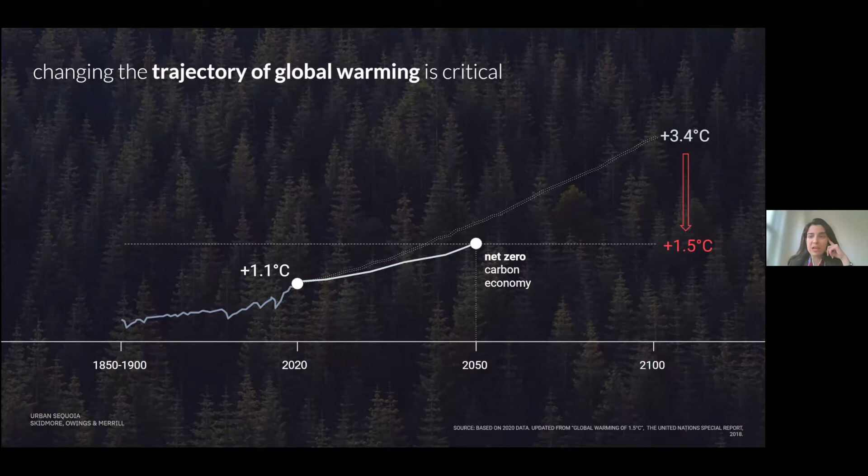And to set the tone a little bit, I think if we keep on going as we do, business as usual, we're about to hit 3 degrees or so by the end of the century. And yet our target should be around 1.5 degrees. So we all have a role to play as individuals, as professionals, and as a society in this as well.

And as part of this growth, urban areas have a big role to play, of course, and we do know the benefits of compact environments, and how resilient they can be, etc.

And it's assumed that with this type of population growth, the demand in the cities will grow also. We are expected to have 2 times the built area by 2060, which is a huge growth if you think about it. And with this equation, the cities around the world account for about 70% of carbon emissions globally.

And this is not because cities are worse than other environments. I think cities are just more compact and the density is so much higher that their emissions are actually higher than other environments. But this shows the importance of how urban environments can become a key player.

And rather than being part of the problem, can we be part of the solution? These are some of the provocations that we started with when we first launched this project.

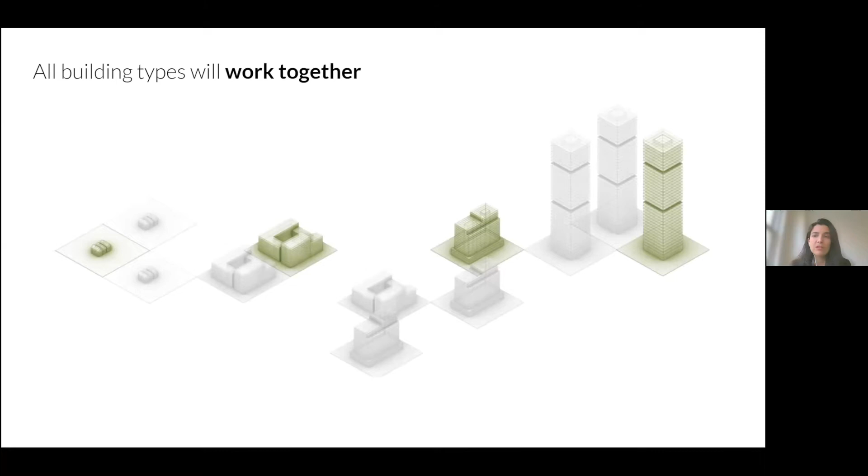But many of the systems and technologies we're looking at today can apply to others, and we do recognize that all different scales and sizes will have to work together in a built environment as a network to create an impactful change. So there's the Urban Sequoia idea born, and as part of this exercise, we're exploring maybe three different categories of technologies and innovation solutions.

Biomaterials: these are materials that use natural processes, such as biobrick, to actually produce building materials, maybe an alternative to timber or bamboo, which are often referred to as net zero or net positive materials.

The second one is nature-based solutions. Can we look at, for example, microalgae and its production on site to actually use it as a biomass, a biofuel? And then the third one is technological advancements, such as direct air capture technologies.

Can we actually imagine a world where direct air capture becomes adopted in the built environment rather than existing in a farm format, as we often refer to it?

With this type of ideas, I think we can probably safely say that today, with structural optimization, architectural optimization, and careful selection of materials, we probably end up at about 60% reduction. To go further, another 35%, we are looking at biomaterials, and we're thinking that's day one. If you look at the lifespan of a building, if it continues to sequester carbon, we can actually be carbon negative, about 3.5 times the emission reduction of a typical building.

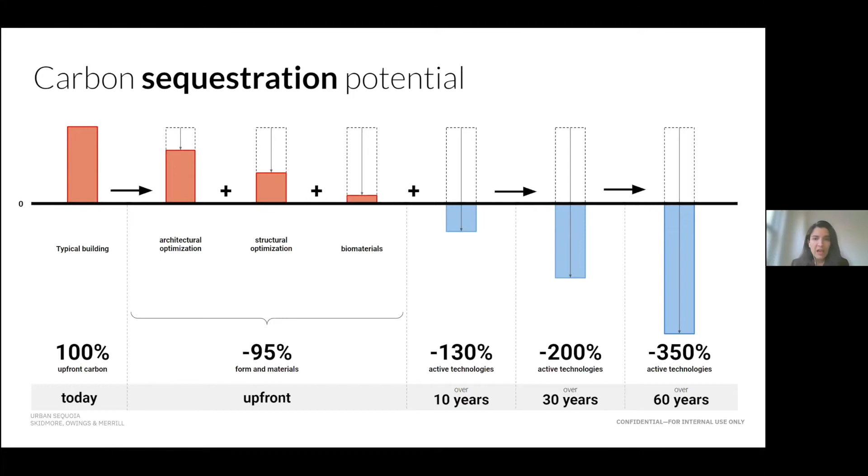This is extremely important. So rather than thinking of a building as an emitter through its lifespan of 50, 60 years, can we see the building as a carbon absorber, a carbon sequestering tool for those 50, 60 years? To do this, many of the systems we look at are going to have to come together. There's not one solution here, but many of these ideas coming together. And Aaron, you can walk us through a bit more detail here.

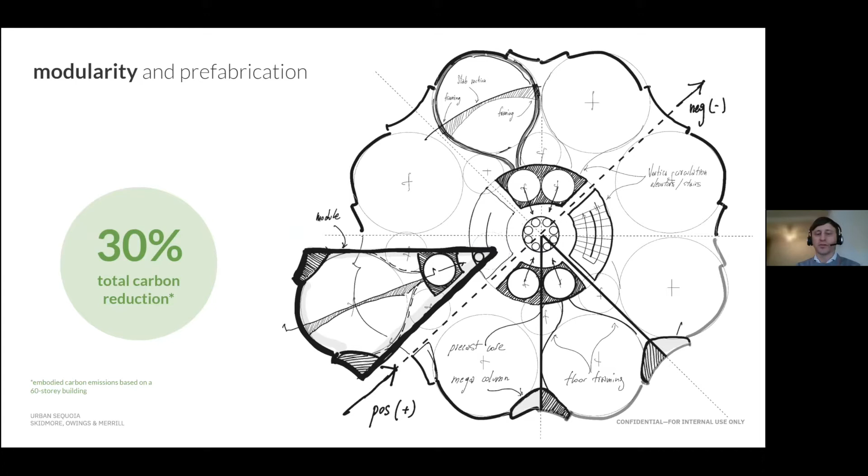In the scenario where our buildings could have 85% prefabricated and modular elements, we could achieve better efficiency, reduce waste, and less movement of people and goods, meaning less pollution to our cities. This reduces 30% of carbon from our high-rise buildings simply by modularity and prefabrication considered from the beginning. If we add integrated systems that are both passive and active, tall buildings of essentially 60 stories could save almost 60% of their carbon.

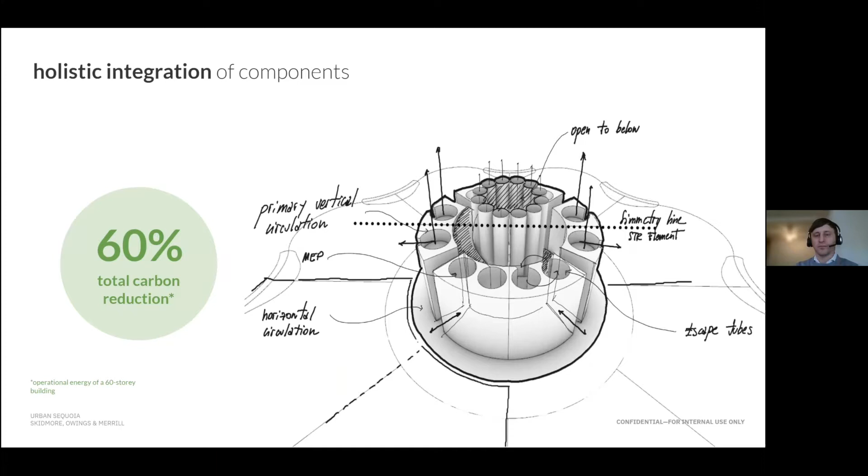The materials we choose for our buildings have an absolutely important impact on the environment, and this is where we must balance nature, natural resources, technology, and the built environment. When we leverage emerging technologies capable of capturing carbon from our atmosphere, we can find a balance between human technology and that natural sequestration process.

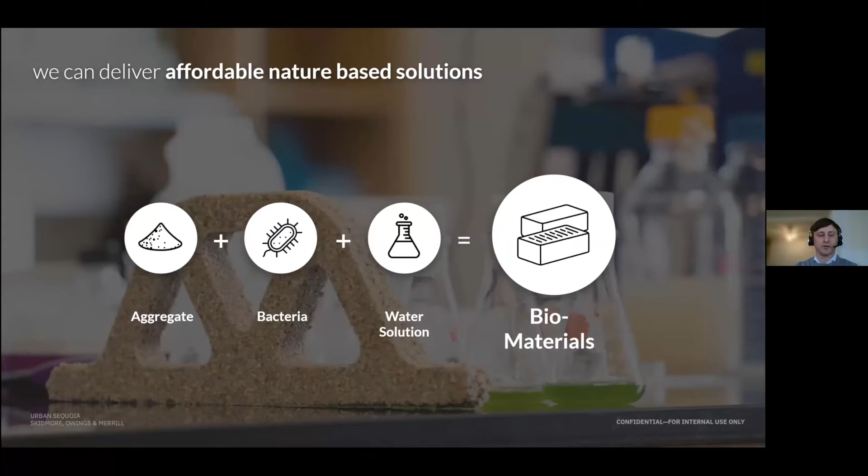With advancements in material science, these nature-based solutions can offer low carbon and scalable alternatives to traditional construction methods. In this situation, biomaterials have the capacity to actively absorb carbon. These biobricks can be made from locally sourced aggregate using low-tech construction methods, bringing a sense of equitability and access to these new types of technologies.

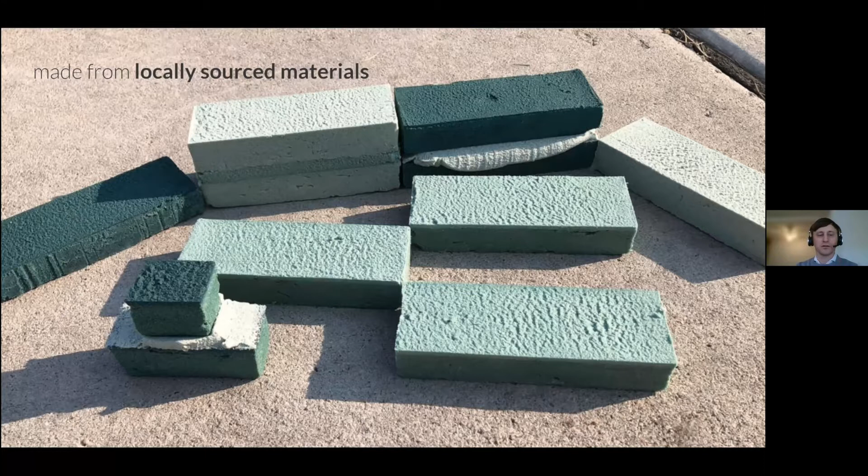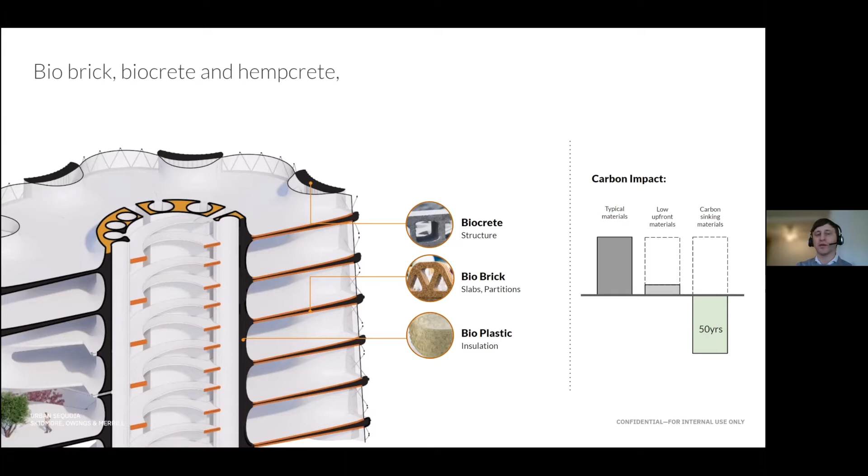Over the last 100 years, we've been predominantly using concrete and steel to build our cities. By simply opting for low carbon materials and considering things such as timber or even these emerging carbon sinking materials such as biobrick, bioplastics, and biocrete, we can significantly reduce the building's carbon emissions and impact on the city. Additionally, these biomaterials can be used in a modular way, beginning to push the boundaries between structural efficiency and carbon sequestration.

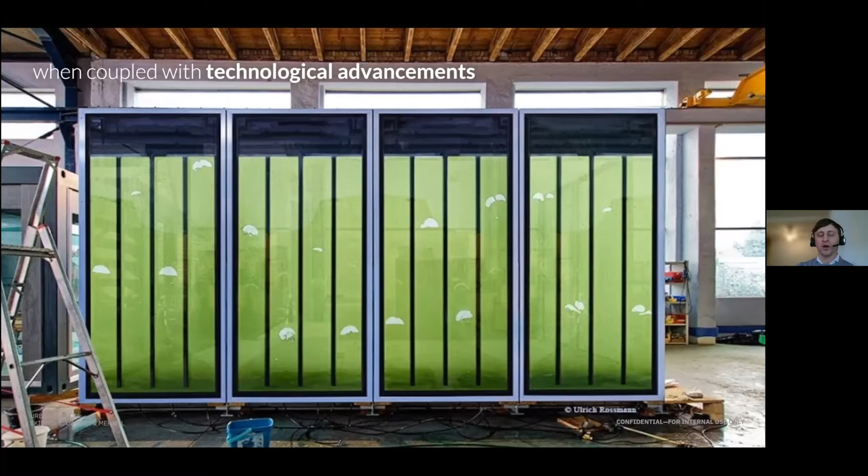Algae, on the other hand, can also be used to create an active carbon sink. Now our buildings can absorb carbon rather than emitting it, just like the initial sequoia tree. So when coupled with technological advancements, these solutions essentially deliver carbon negative buildings at scale.

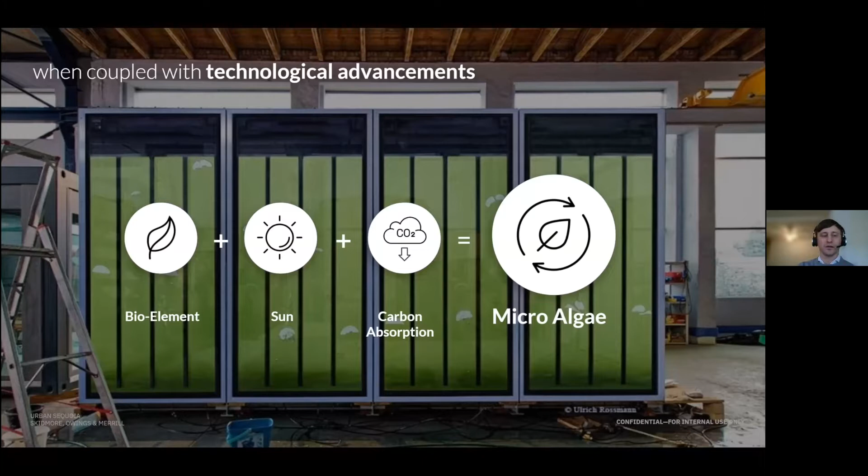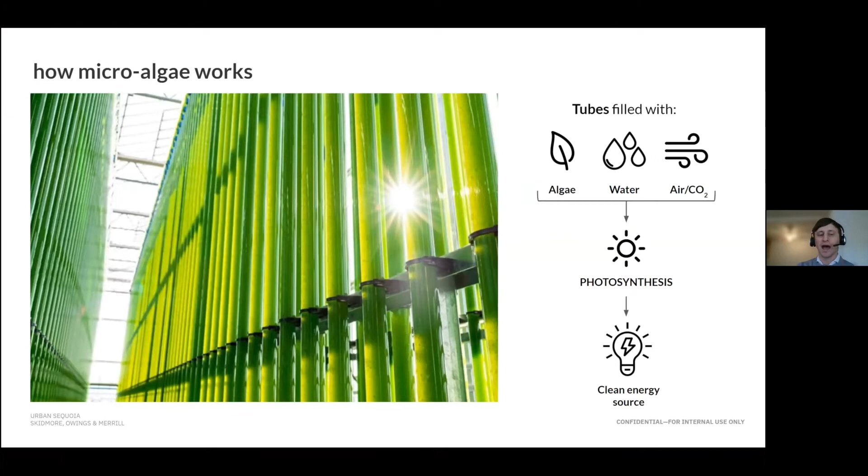Algae can be integrated and designed into a building's enclosures by harnessing the power of the sun and leveraging the naturally occurring processes of photosynthesis. Algae, water, and air can be combined in tubes exposed to sunlight and then naturally capture carbon, used as a source for clean energy.

These algae systems can be developed and designed into unitized panels to simply integrate into a building's enclosure, thus producing clean fuel for the building itself and further leveraging this energy source at the urban scale.

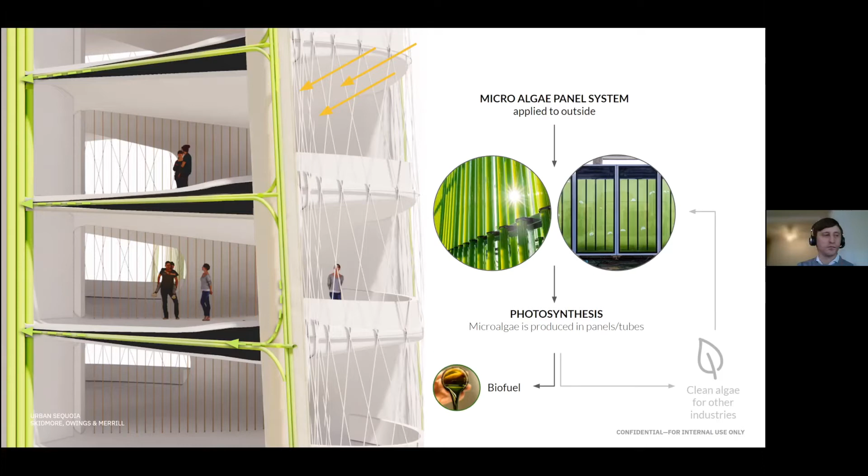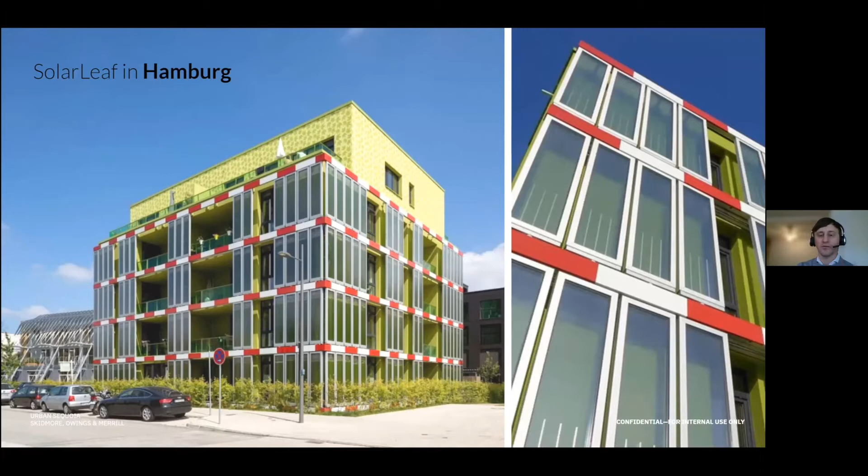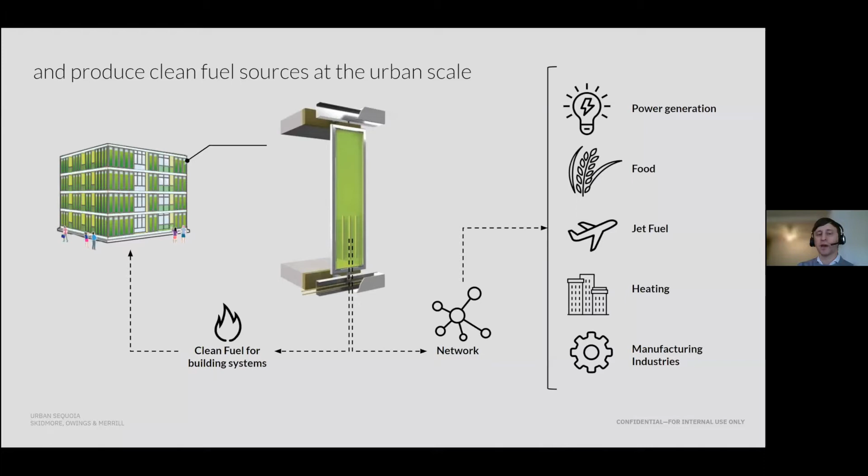As an example, from our partners at Arup in Hamburg, Germany, who have worked very closely with local architects on the SolarLeaf building, which already performs this process of algae and energy sequestration today. In this example, by producing biomass, algae can be used as a clean fuel source at the urban scale for power, food, fuel, heat, and manufacturing.

With the recent and emerging technological advancements of carbon capture and carbon storage, we can dramatically accelerate the decarbonization of the building industry.

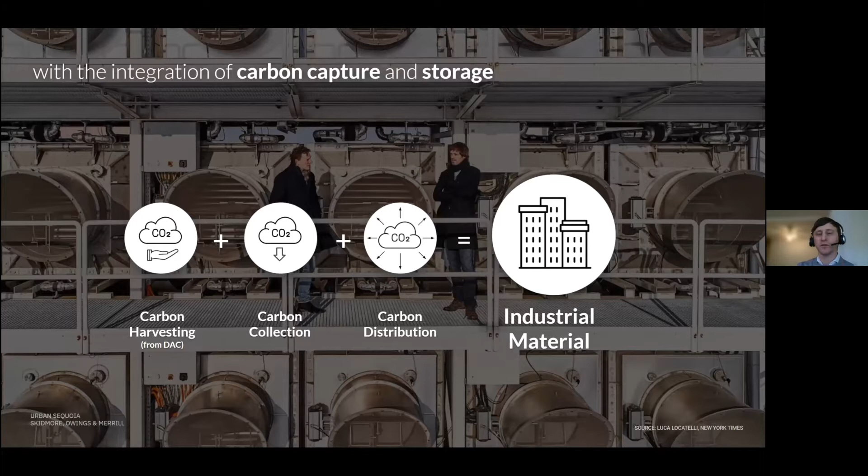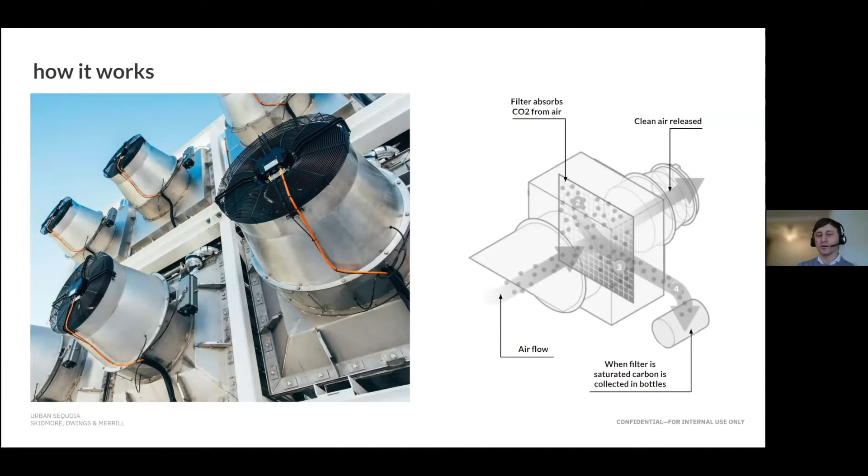Well, how does this work? The air flows into a device with a specialized filter. This filter captures the CO2, and when saturated, carbon is then collected into a bottle. We can harness a building's central core and utilize concepts such as stack effect, where we can enable airflow to move up through the building in a low energy situation, essentially taking the direct air capture and integrating it into zero energy consumption.

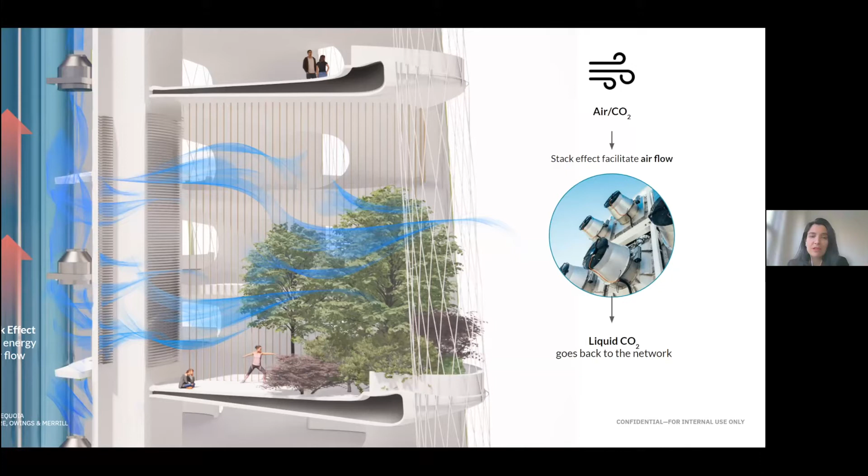Over 15 years, we've seen a dramatic decrease, about 90% cost decrease in PV implementation. And the implementation side has increased incredibly well in many locations around the world. Many of our buildings and built environments today have incorporated PV panels, either on the facades or roofs, as part of building integrated systems.

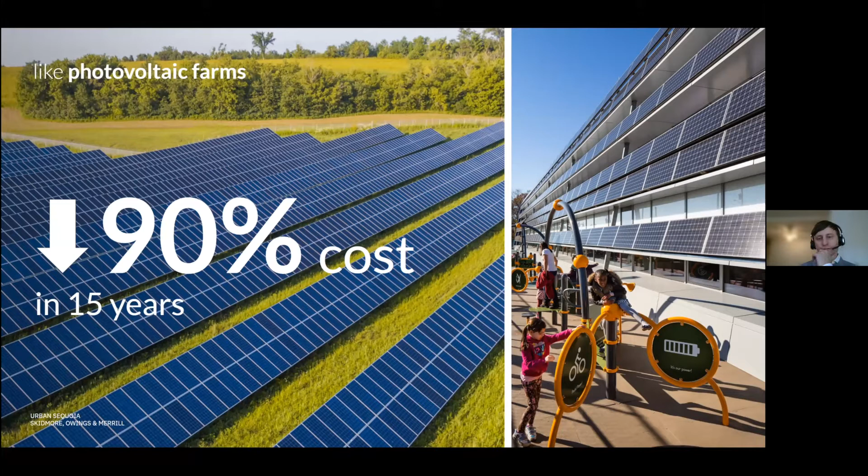So can we imagine a similar scenario where CDR can also be adopted? Can we go from the DAC farms you see on the left side and actually go to building integrated systems that you might see on the right side? What this might do is also broaden implementation, cost reduction, and probably policies that came along with the PVs back in the day. Similar ideas we are seeing percolating as we speak today. Interestingly, some of you might have seen this at COP26 conference.

Our Secretary of Energy talked about some of the technologies we should be looking forward to in order to capture carbon from the atmosphere. Direct air capture technology was singled out as one of the big potentials. She also highlighted how energy costs for the government were going to go down, with significant investment and efforts being put towards this. So it's looking quite optimistic for the future of a system like this.

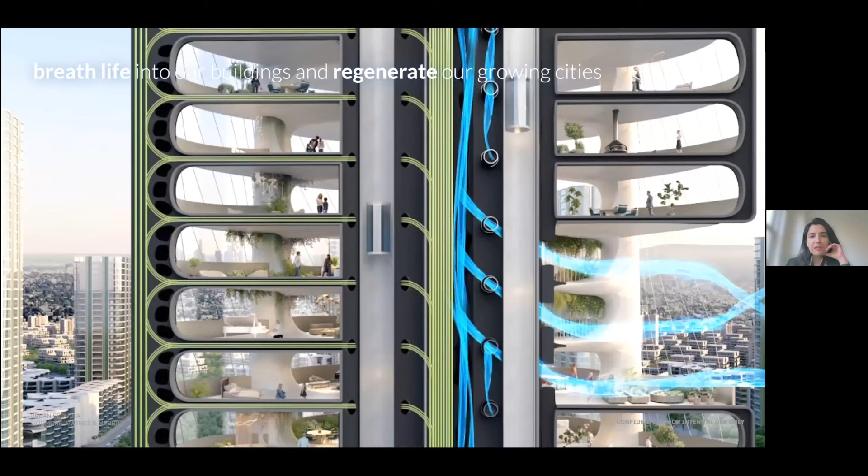To bring everything together, in this prototype building we're suggesting: can we look at biomaterial solutions, nature-based solutions such as microalgae, and direct air capture technology, and bring them together to actually create a breathing building, a carbon-absorbing building, as a prototype?

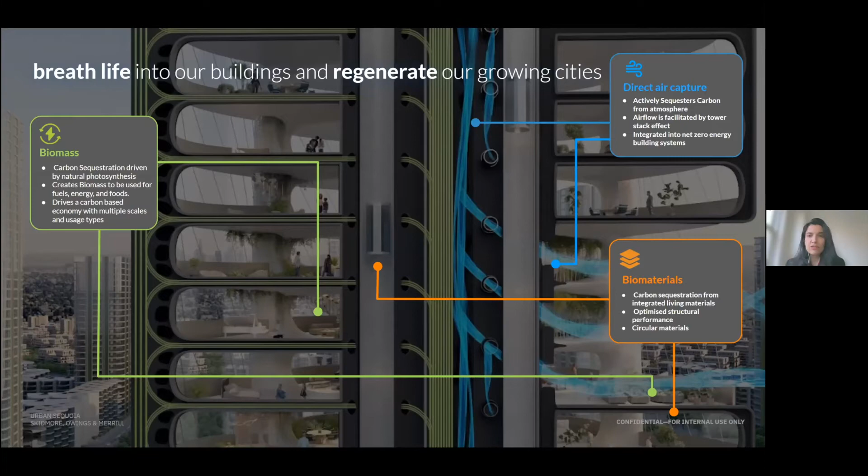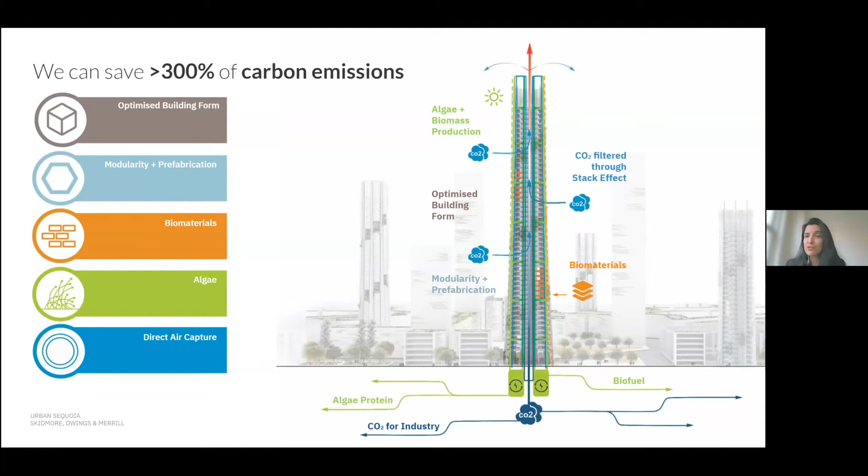As Aaron described, this building will not only exist alone in its context, but needs to be part of a network of buildings. A building alone can sequester about 300% more carbon than it would have emitted. But if we can connect it to a network of buildings in our districts, in our cities, it can be even more effective. Some of the harnessed materials, such as carbon or microalgae, could be used in other industries.

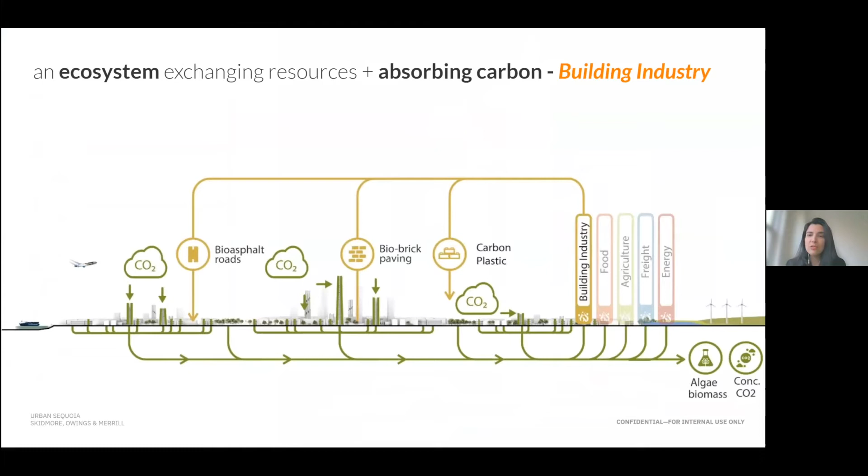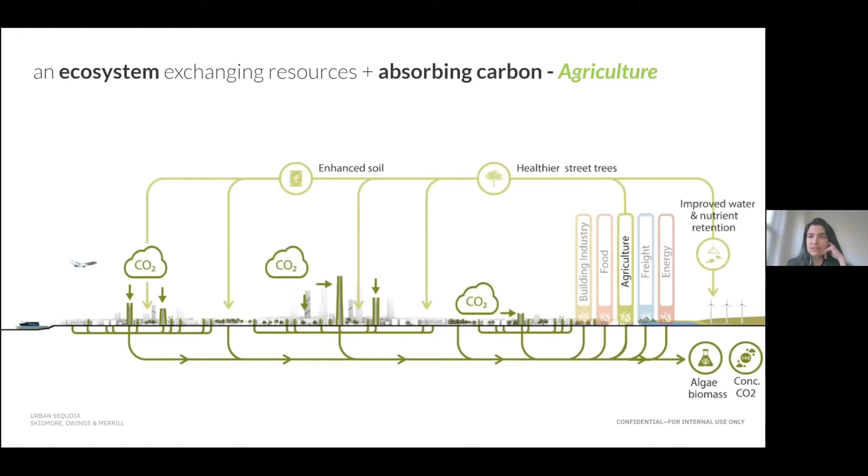Such as the building industry, or the food industry as carbonation tools or bioprotein. It could be used in agriculture as fertilizers, and could offer an alternative to biomass and biofuel in freight and energy industries too. Can we imagine a network of these that connect together, even smarter than it would have been as a single standalone building?

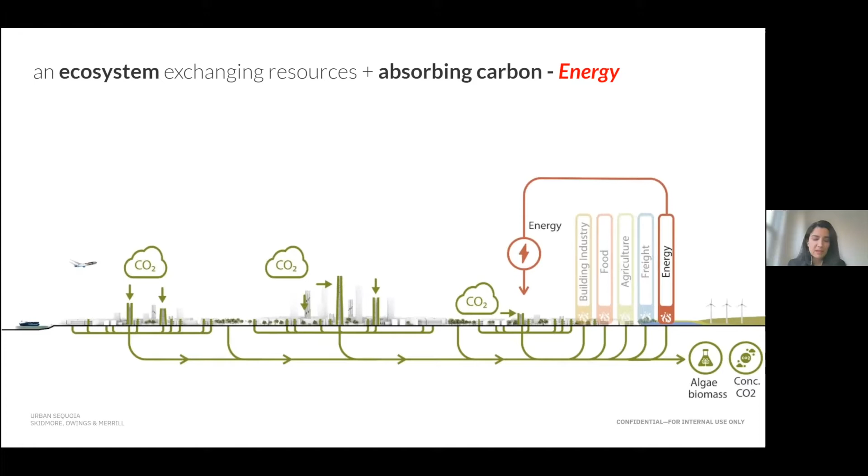As we think about the spaces between the buildings too, we looked at what it could mean to use these spaces also as carbon-absorbing tools. Can we actually replace some of the hard surfaces with materials like biobricks? Can we create biopavers? Can we use CO2-storing tarmac? Can we use some bioplastics? Can we use CDRs also at this scale, and really optimize and maximize the potential of natural sequestration with greenery as well?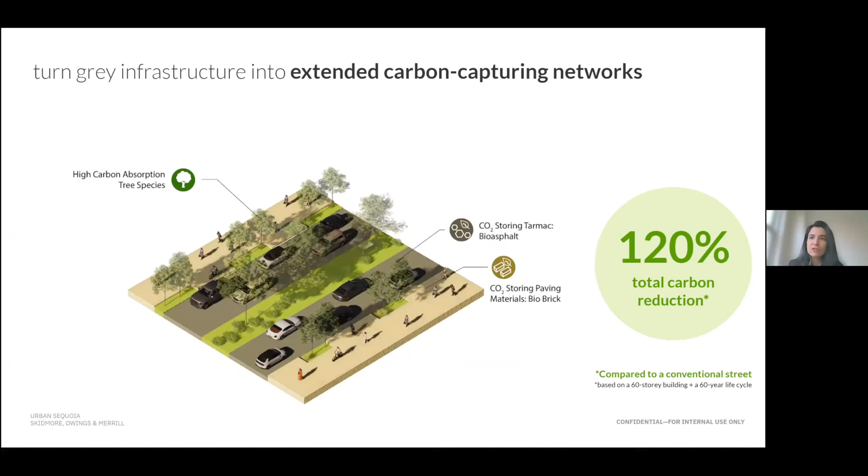With the integration of greenery, maybe we can achieve about 120% carbon reduction. With intensive planting in parks, maybe about 200%, again over 60 years. And with integrated urban blocks, we might be able to achieve another 110%. This is approximately 1,500 tons of CO2 per year for a kilometer square of a city.

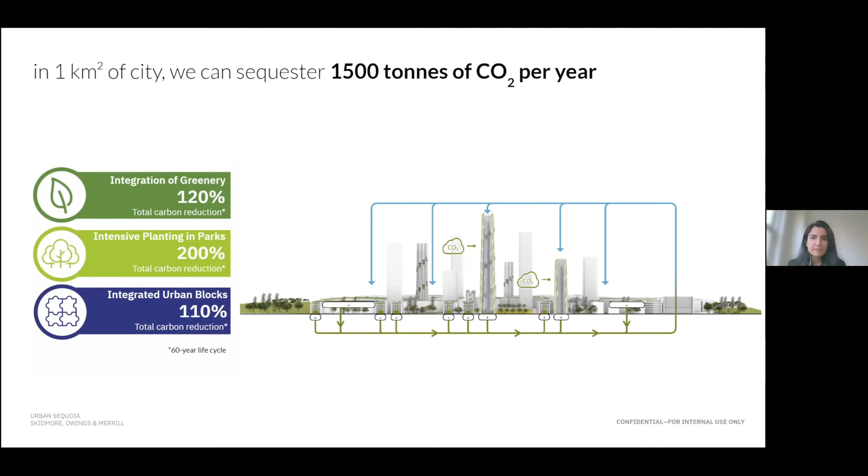Let's imagine for a second, in New York, what this could mean. Could we create a network of these, both carbon-sequestering, algae-producing, as well as biobrick materials? And if we could create it in a dense city like New York, could we also do it in other places? Could we create a series of urban sequoia forests around the world in our cities? Can each city start sequestering carbon, absorbing carbon from the atmosphere rather than emitting it? This could mean we save about 1.6 billion tons of carbon every year from the atmosphere. It's not the only solution, but it is huge in our carbon equation.

We do know that this has opportunities and challenges, but if we dream about it for a second, the built environment can actually be part of the solution, and not part of the problem.